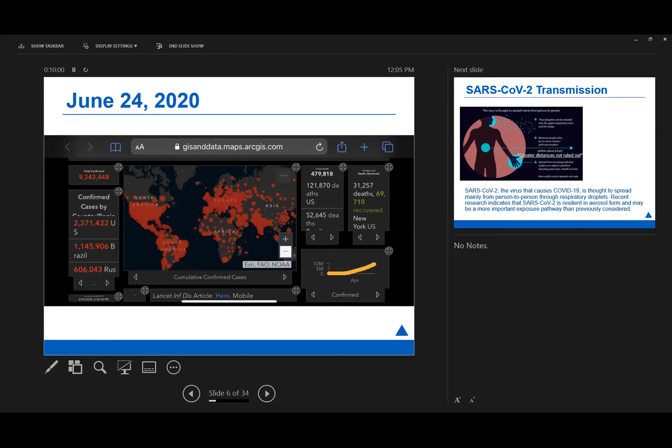So definitely we have a lot going on right now, and we're trying to figure out how to cope and how to deal with it. So the SARS-CoV-2 virus is what causes the COVID-19 disease, and primarily it's spread through droplet transmission. When we're close to people, we're either hugging them, or we're nearby and they sneeze or they cough on us, or we touch something. There's fomite transfer, where you touch an infected surface and transmit that into your body by rubbing your eyes, that sort of thing.

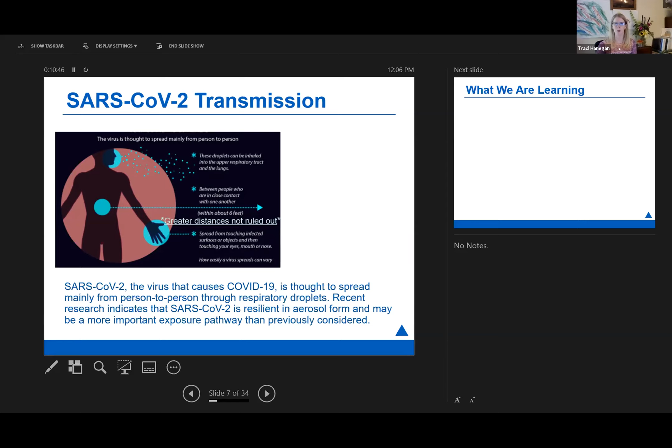But there's also spread that goes further than that. Probably not as severe as measles or tuberculosis, where small aerosols travel for many, many feet of distance and through the ducts and currents, but we're still learning more about how far that can go. But we know that there have been cases of transmission further than what was originally thought.

So the SARS-CoV-2 virus is about 0.12 micrometers, and that's pretty tiny. But fortunately, when people shed that virus, it's almost always attached to a droplet. So when you think about filtration and how small of a particulate you can catch with a certain kind of filter, you've got to remember that it's usually attached to a droplet and it's much larger, so it's easier to catch.

But we're learning a lot, unfortunately, about super spreader events that happen, like the Skagit Valley Choir, where people were obeying social distancing, they were washing their hands, they spread out in the church, and they had 47 out of 60 people that became infected in a 2-hour choir practice.

There's also the Guangzhou restaurant in China, where they had 10 out of 21 people in the room at nearby tables that were infected. One thing some follow-up studies by Dr. Lee showed, though, is that they had really poor ventilation in that space, and that makes a difference. We're going to learn some ideas on how to improve things with that. Other big super spreader events: weddings, funerals, and there's been a big outbreak at several churches that have reopened as well.

And then we learned quite a bit from a study at the University of Nebraska Medical Center, where they looked at people that were sick with COVID-19. They sampled particulates in the room, on surfaces, outside the room, and they found that there was, well, not necessarily viable, but definitely SARS-CoV-2 virus located in all the locations listed there.

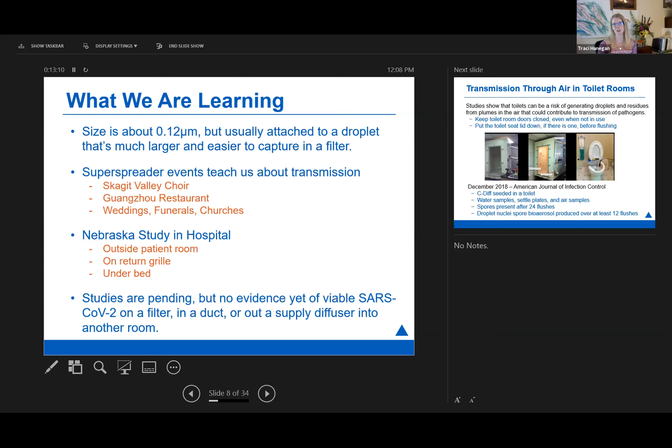We do know that there have been patients with and without COVID in different rooms, and the people that hadn't had COVID-19 were not infected. And so that leads us to believe that it's not likely that it's traveling all over through the ductwork, but again, studies are pending.

We do know that they measured it in toilet rooms, and I'm on the ASHRAE Infectious Diseases Committee. We talk about toilet flush plume all the time and how it can spread pathogens. And this was a study that was done back in December 2018: flush a toilet, and there's still infectious pathogens that can be released time and time again. So we really want to start thinking more about putting lids on toilet seats.

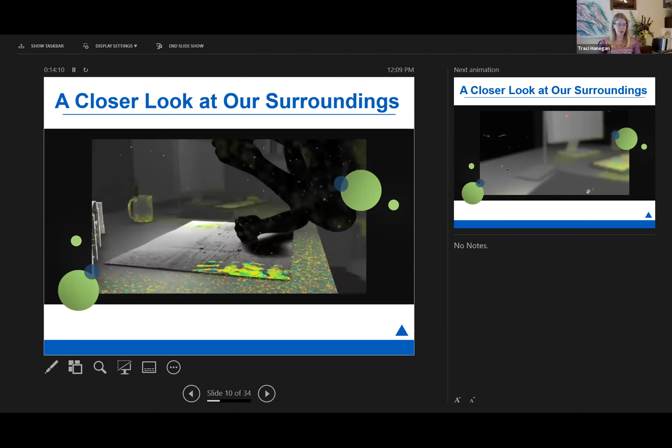So we take a closer look at our surroundings. We look at the microbes that are floating around in the air around us. We're about 1/3 microbe and about 2/3 human by cell count. Our bodies are full of microbes everywhere. And as we interact with our environment, we're shedding microbes and we're picking up more microbes, either by touch or what we inhale. And we know that our whole microbiome affects our health.

It affects people's mental health, our digestion. Poor microbial imbalance can lead to issues with our neurological development and our mental health. It can lead to inflammatory autoimmune diseases. So I worry a little bit about everybody trying to clean up everything and wash our hands so much and bleach everything. What are we doing to our microbes around us?

We really impact the buildings that we live in by what we bring inside with us, but also how we condition that air, the way we filter it, the way we humidify it, or what temperature we have. We build our environment, and then that environment in turn shapes us. So it really matters how we design our buildings.

There are new tools though, and we're going to show you some new tools. This is one: the United States Department of Agriculture's Animal and Plant Health Inspection Service, we do a lot of work for. They came up with a dog sniffing program that's pretty effective, where they can sniff out avian influenza with a dog. And they're using it for medical purposes as well, sniffing out cancers in humans and things like that. So we have new tools for that.

When we sample the environment, we used to set out Petri dishes and figure out what was in the air. Now we can take a swab and use PCR, polymerase chain reaction analysis. And we found that we were only seeing about 10% of the microbes that were out there when we used the Petri dish, compared to what we can now sample and test for. Much more effective at looking at things than we used to be.

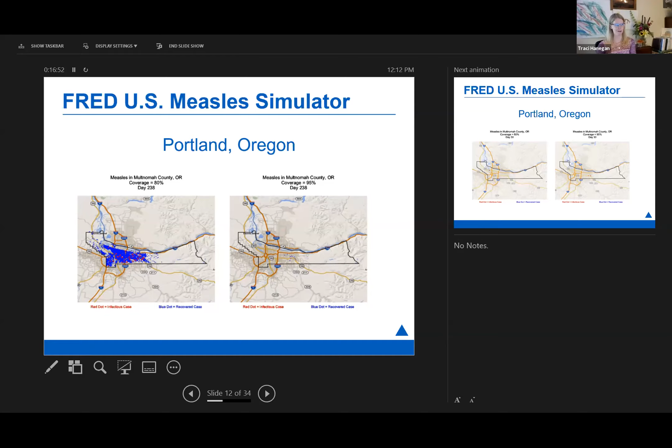Cool. Thanks a lot. Let me share my screen. Okay, can everyone see that all right? Yep. Cool. That's good. Thank you.

So just a little bit about me. I'm a fire protection engineer with Coffman. Originally structural engineer, fire protection. Fire protection is a bit unique, probably more natural to have medically minded people involved in this. But fire protection actually has some pretty direct and perhaps surprising applications. As part of being a fire protection engineer, we're very often involved in human behavior and the different mechanisms by which, especially buildings, are going to impact a human response. Generally, we've been looking at evacuation scenarios, but with COVID, we're looking at a slightly different scenario. So I will share some of the tools that we're using in order to utilize engineering analysis that has often been done for evacuation scenarios for this new environment.

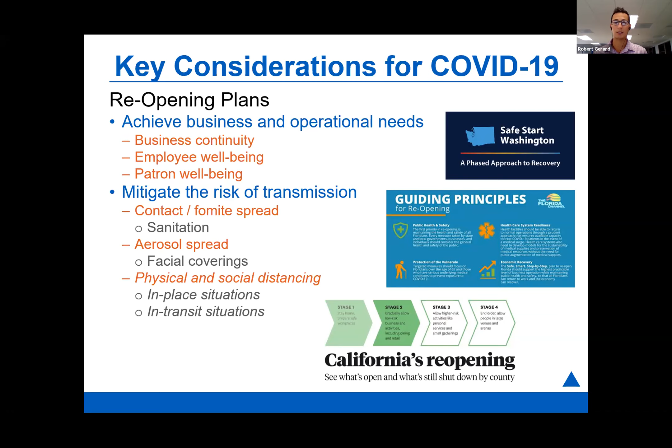So before launching into it, this all kind of fits within the goal of trying to reopen and re-enter society as prior to COVID-19. What we were used to doing as highly social human beings, we like to engage with each other. And of course, that is where a lot of the risk is coming from in terms of transmission from different populations. So as part of the reopening strategy, we're focusing on a couple different areas. Of course, achieving business and operational needs around some of that continuity, just getting back into the workplace, trying to protect, if you will, employees and patrons, and of course, focusing around what is best practice around mitigating some of that risk. So I think we're all familiar with the importance of sanitation, facial coverings, and what we're doing is we're proposing a tool around trying to enhance the capability to physically and socially distance when we are reentering some of those populations.

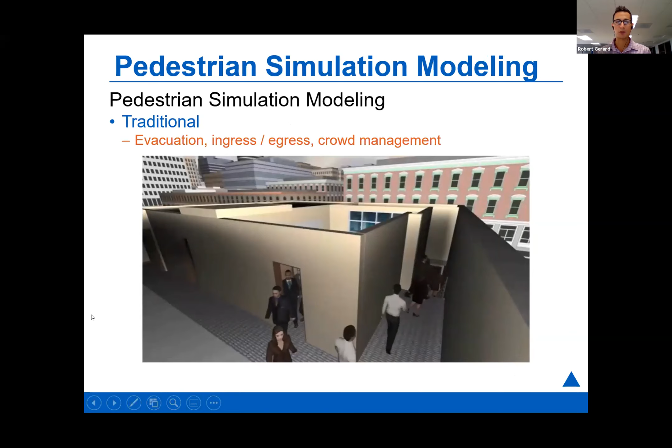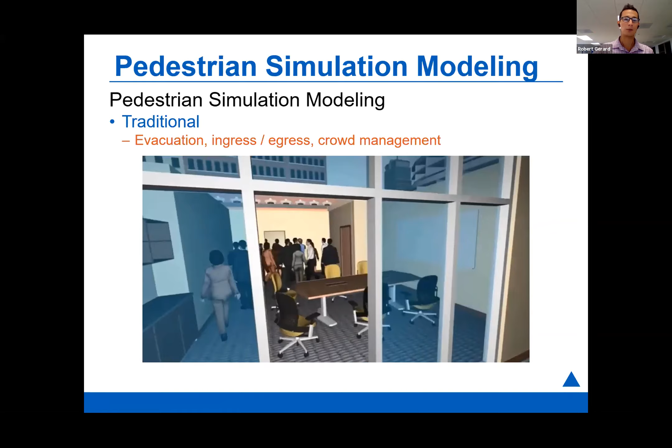So in terms of fire protection, what we've often looked at is evacuation scenarios or emergency scenarios where we can model human behavior in response to some sort of event or some sort of threat, and evaluate how occupants are able to evacuate from these spaces. So this is kind of the traditional way of doing things, and it really is putting yourself in the shoes of what someone might be experiencing and making sure, not just from the human behavior point of view, but also from the building point of view, that we're able to accommodate a response, in this case, evacuating the building, that is going to be acceptable.

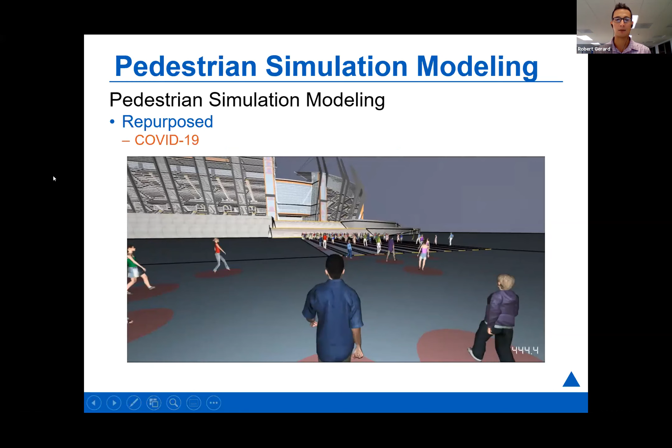So of course, we're looking at a different scenario now with COVID, that we're seeking to try and physically, socially distance from each other. And so there's new considerations that are important to be aware of as we're seeking to try and re-enter and assimilate into this new environment as businesses are opening, as we're starting to have different events, things like that. So as Tracy had mentioned, we're alluding to a couple different mitigation efforts that we as engineers and architects and as patrons can utilize.

Of course, one is building HVAC systems, which Tracy is a great person to talk to, and she's going to talk a little bit more about that after I present pedestrian simulation modeling. But we're going to focus more on physical and social distancing. So when I say physical distancing, what I mean is looking at some of those static conditions. So what are the things that we can do to create physical distance from each other? And this is generally around continuously occupied areas.

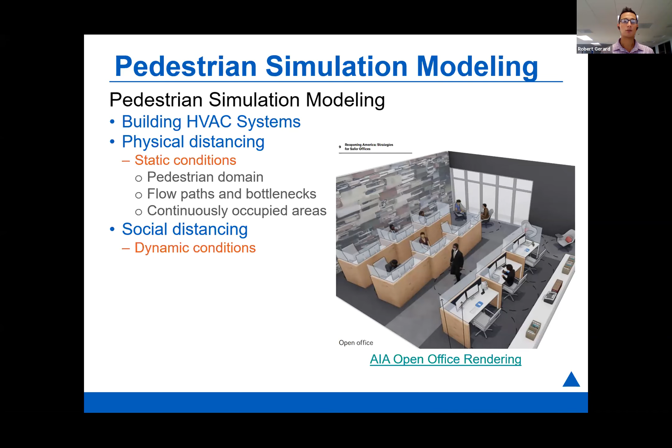So this is something we as designers and architects can look at a traditional floor plan, and we can start to separate our desks, our workplaces, conference rooms, things like that. So somewhat straightforward, which is really positive. But as human beings and as social and dynamic creatures, social distancing is a little bit more complicated. What happens when people start to move, then those static plans that we're looking at start to become a bit challenged. So how do we maintain that 6-foot separation? Currently that is the best guidance from CDC and a number of organizations.

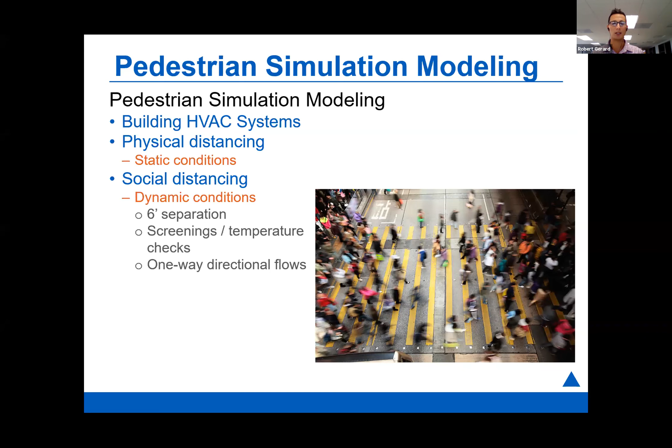And what other checks are we going to have in order to verify or kind of evaluate the risk or certain indicators that might indicate that we might have to isolate certain populations? So there's things that we can do in order to evaluate some of these criteria and try to implement these best practices. So some considerations that go into that, even before we do the modeling, is firstly understanding what the built environment is. And so one way to think about this is the architecture and the engineering.

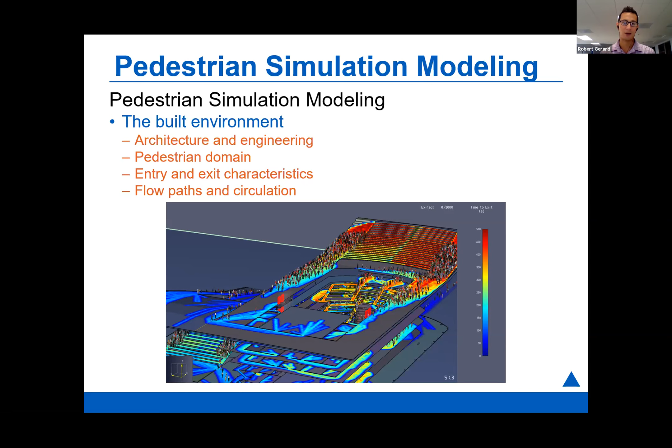So what is the domain that occupants or patrons or pedestrians could navigate within a space? What does this mean in terms of different flow paths, entry and exit conditions, especially vertical egress? I'm sure we've all seen bottlenecks at stairs, escalators, ramps, things like that. But understanding some of these considerations. This is where fire protection engineering starts to become a bit more relevant, is not just looking at the architecture and engineering, but also looking at human behavior.

And so it's trying to understand what the experience of the occupant would be and what some of these goals are. And of course, there's quantitative metrics that go into that. And fortunately, in the field of fire protection engineering, a lot of this is quantified based on available data that can be utilized and applied in a number of different ways.

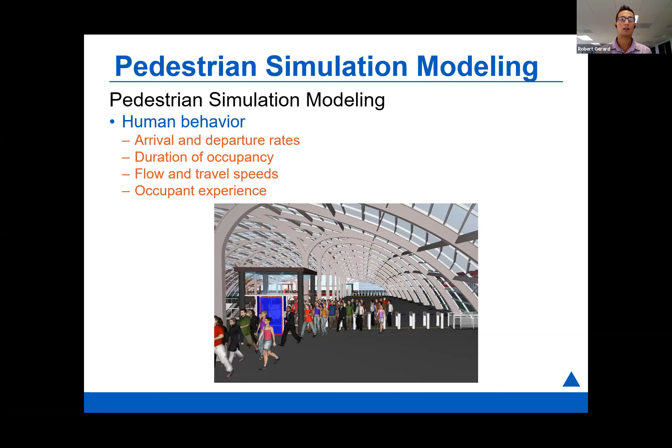And when we start to get into COVID-19 management procedures, looking at that more dynamic environment, we can start to utilize and apply some of these different considerations that we're starting to have to pay attention to into these models, into simulations. And it's a really powerful visual tool to graphically and analytically show what this sort of response would be. So this video that we're seeing right here is the application of the 6-foot separation, showing that occupants are really seeking to distance from each other, and what that means in terms of the flow and the movement within the space.

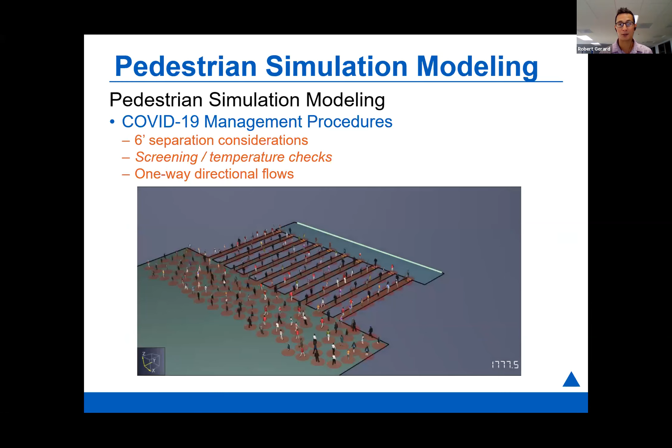Another way to evaluate this is if we're going to have, say, screening or temperature checks, understanding what that means in terms of the markers. I'm sure many of us have tried to go to the grocery store and had to wait outside for a little while. And so understanding realistically what that means in terms of different management procedures, and maybe there's a way to entertain people if we know that we're going to have a 20-30 minute queue waiting outside.

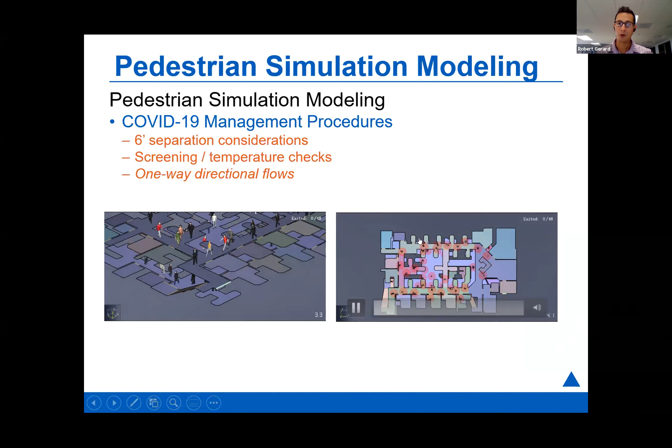And then another way is acknowledging that in the traditional sense where we're able to congregate, we're able to be closer and have tighter densities to each other, trying to look at ways to reduce the number of interactions or the amount of interactions, or another way to look at it is the density of occupants within the space. So something like a one-way flow. So again, we've probably seen that at the grocery store, all intended to try and minimize the number and the amount of interactions to try and have a more efficient directional movement within spaces.

So one way to think about it is as a digital due diligence: as we're all trying to focus on reopening and preparing our workplaces, our sites, our offices, or potentially even larger event centers and the like, to be prepared to protect against and mitigate some of these risks of transmission, it's important that we're very clear about what it is that we're actually trying to achieve.

And there's a number of sources available. I'd highly encourage everyone to take a look. But this is something that I thought was really interesting, something that Tracy shared around the hierarchy of controls. There's a number of different steps, if you will, that we as occupants, as designers, as managers can utilize.

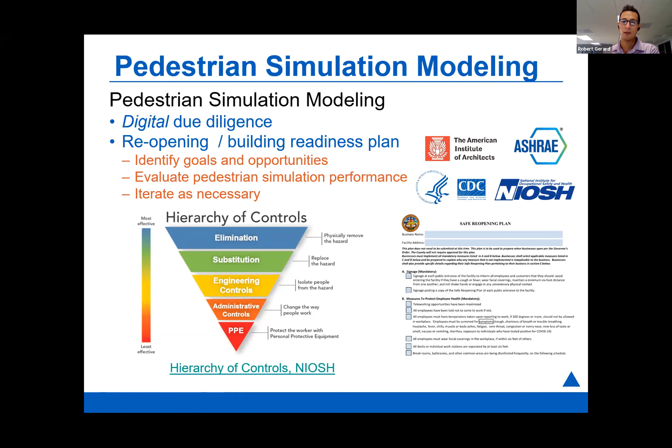This type of tool is within these engineering controls: where we are seeing a greater level of risk, say we're located in a hotspot where there's an outbreak, or we're especially concerned about vulnerable populations, we're able to utilize additional measures to try and control that risk. It would be great if we could eliminate it, but within the realistic bounds of our current situation, we try to control that risk.

So we're quickly going to look at a case study and what that looks like. We've looked at a number of different organizations, situations, clients, and we thought that this one was maybe a little bit easier to recognize some of the value, primarily because it's a little bit smaller. I'll share a little bit about some of the considerations about larger venues at the very end here.

This is an art gallery and design exhibit, primarily assembly occupancy. They seek to have large galleries, exhibitions, large events. Of course, that's probably not feasible within our current environment right now. So we're helping this gallery to understand what it is to reintroduce occupants and patrons within this environment and what this is going to mean in terms of trying to achieve those social and physical distance practices.

So a quick little overview of what the gallery looks like. We have a large outdoor entrance arcade, and it's a primary entrance coming into this mezzanine area, an entry desk where occupants are able to get information, learn about the artists, learn about the different installations, and then proceed down the stair into the large open gallery area on the bottom where there's a number of different installations and different spaces to traditionally interact with them.

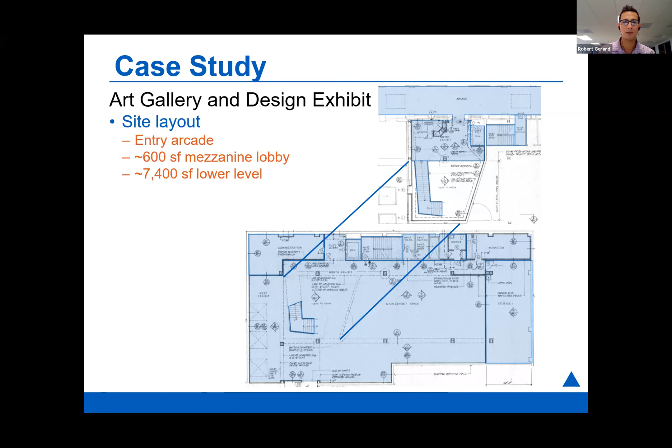Of course, due to sanitation reasons and contact, that was recommended to not be encouraged or utilized within the space, so that's something the organization has sought to remove. Even before we did the modeling, there's a couple different items to think about. Firstly, knowing your business, your site, your patrons is a big one. What is the experience that you're trying to curate? And being clear on our priorities: as we're entering this COVID environment, what is it that we're trying to achieve?

In terms of knowing the business, probably the reality of the situation is knowing what the business objectives are. Many businesses are seeking to reopen and get closer to pre-COVID conditions. So what does that mean for this organization? We might speculate on that, but it relies on a level of interaction and engagement with the organization.

One of the key points that I thought was really enlightening for me was that, in talking about the business needs of this organization, donations were a very large facet of how they were able to financially support themselves. And one of the key aspects of getting donations is to facilitate that face-to-face interaction and share details around the local presence of the artists and their impacts, the different events and organizations, and especially the philanthropic efforts of the Institute.

And of course, this relies on being able to spend time and have a conversation with your patrons, which comes with associated risks. So it's a business reality, but also something that needs to be taken into consideration as part of the social and physical distancing.

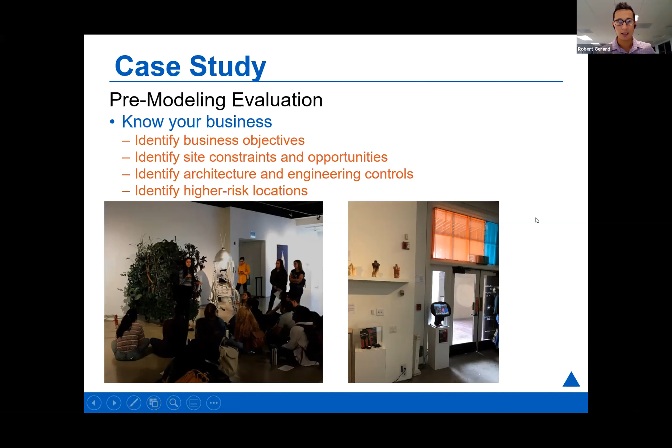And of course, one of the other constraints is going to be the site itself, so that architecture and engineering. And so identifying some of those key hotspots even before we did the modeling. So acknowledging we have a large outdoor space, trying to utilize some of the queuing on the outside, that if we're going to have a temperature check, or if we're going to have this conversation about donations, about the intent of the space, some of the background of the different artists, it's encouraged to occur at a location where there's maybe a little bit more ventilation, have a plastic screen or a barrier up to try and mitigate some of that particulate spread.

Getting down into the space, identifying that we have the potential for a directional flow down and up. We actually wanted to use the stair over here, but what the organization was seeking to do is try and have a donation box at the exit as well. So entry in one side, coming down, and then exit out the other, and then have a donation box at the end over here. So understanding you could potentially have bottlenecks at the top and the bottom of the stairs. This stair was considered to preferably be available for evacuation scenario, but not for this COVID environment.

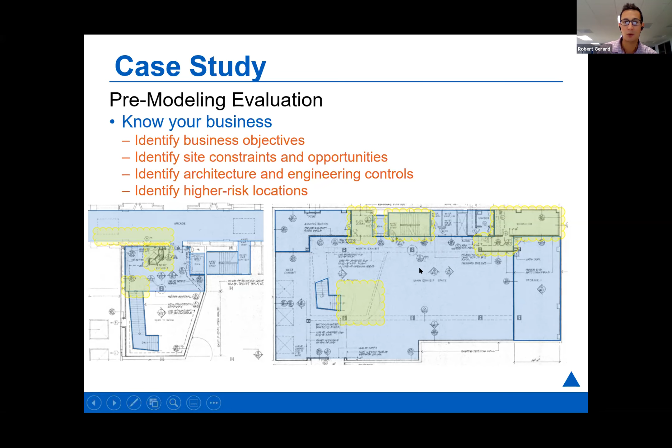Looking at different dead end possibilities, make sure that we're trying to mitigate the interactions between patrons in this location. We have an elevator over here, so another potential queuing location. So a number of different considerations taken into account even before doing the modeling itself.

Looking at the patrons, seeking to try and have something resembling the original occupation of the space. I don't know that we'll be able, or probably it is not recommended, to have the density and the number of patrons that they had before, but seeking to try and figure out what a reasonable maximum number could be within being able to achieve that density limitation and being able to confirm that occupants are going to be able to space out if they're within that 6-foot bubble, if you will.

And one of the important keys is really putting yourself in their shoes too. So understanding what experience it is that we're trying to curate in this space. We want to be able to enable people to wander and explore and to spend time with the installations and get up right next to it. So we know that we're going to intentionally try and not have as many occupants so they're able to be comfortable within the space and interact with the artwork in a way that is conducive to what the gallery is intending to do.

So in terms of some of those priorities, of course, well-being and health is one of the top priorities for any organization, but being able to achieve those business objectives and be able to curate that experience. And so what we did even before we did the model is try to identify some acceptance criteria, if you will. So what is acceptable and what might be less acceptable even before we do the model, so we can look at the results of the models and then evaluate the performance. And then we can collaborate with the organization to understand what sort of changes might be appropriate.

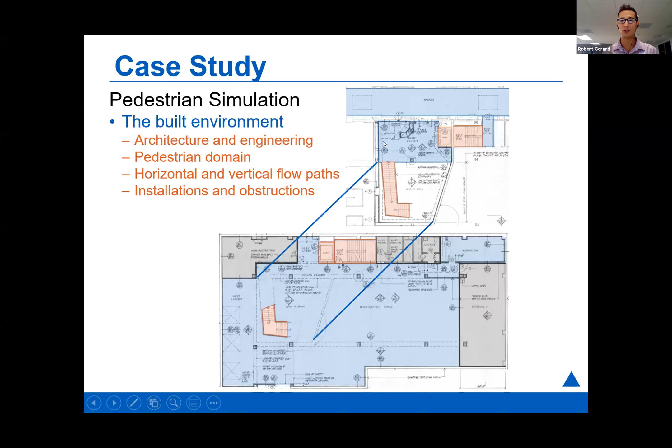So finally getting into building the model here, one of the first steps is to understand where our domain is. And so we have a large outdoor arcade, we have this entry lobby, we have our vertical paths of ingress and egress and flow within the spaces, and identifying where front of house is, where back of house is, and making sure that we're aware of the different areas. Of course, the installations are another key aspect of that.

So working with the organization to understand not just diagrammatically, but also kind of physically what a reasonable obstruction might be in terms of where occupants can't go. But in addition to that, highlighting where we want them to go. And this is probably one of the keys that's unique to this space, and really understanding the unique needs of this gallery: some of these areas right in front of the installation are going to be areas where we're actually going to want and encourage and enable some of the patrons to spend a little bit more time and to really spend some time with that artwork and to be distanced from each other all the same.

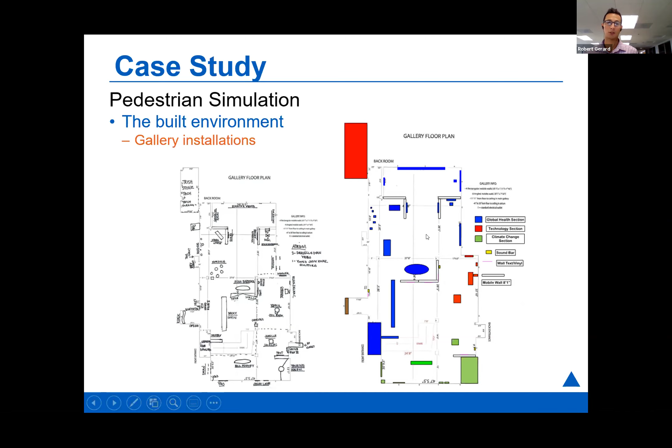So I think it's really important to be able to have some of these open spaces, but the distribution of patrons is an important consideration in addition to some of those overall goals. So what does that mean in terms of the model? As we're looking to build it, we're trying to build in some of these physical barriers within the space to physically distance from each other.

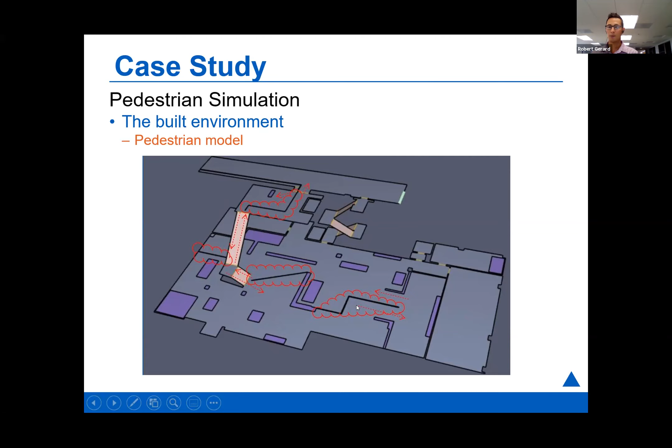So we have some queuing on the outside, we have our one-way flows, and we're really trying to utilize, if we can think of a one-way directional flow, not just in some of these locations, but seeking to implement something of a counterclockwise flow here. So as you come down, you're moving around this location, and with everyone moving in the same direction, hopefully they're also being aware of their social distance from each other as well.

So incorporating some of those patron behaviors, some of those quantitative metrics: how long do we find on average that patrons are going to be within the space? How many people do we anticipate? What do we think is a maximum number of occupants that could be utilized within this space within these current conditions? So a far cry from the 250-ish occupants that they might have in a pre-COVID situation, but somewhere in the estimate of 20 to 50 patrons, and that's something that the business would be pretty happy with.

Incorporating some of these physical and social distancing parameters is important as well. And so when we're looking to try and do that, we can apply a wait time, simulating some of that interaction with staff as the different occupants are entering within the space, and creating almost waypoints, if you will. So assuming to some degree that each of the patrons is interested in checking out the different installations and the different pieces of artwork, having them move along together within a path. And this is something that we might be specifying, but it is something that we can also randomize as part of this assessment. So there's a lot of flexibility in ways that we can direct and manage the patron movement within this space.

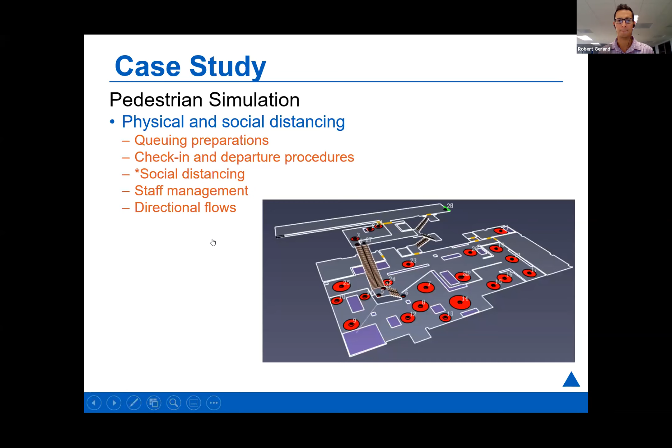And what does this look like? It's very much an iterative process working with the organization. So one of the first steps we did is look at, well, what does something like 20 patrons look like? And so of course this is fast forwarded, but we can see that different patrons are coming in, spending a little bit of time at this entry location, and then spending time with the different galleries, installations. We can see that they're pretty well spaced out. So we have a couple occupants that are somewhat close to each other. We can see that they're maintaining that 6-foot separation. And so this could be considered a pretty effective means of applying that physical and social distancing within the space.

So one of the benefits here is we can graphically see that at first glance, there's no real red flags. So what does that mean? Maybe there's an opportunity to increase the number of patrons and see if we're able to accommodate this sort of behavior with a greater number of occupants. So we kind of shot for the moon on this one, and we went up to about 50 patrons, and we can see that all this behavior up at the entry seems to be acceptable. This one slowed down a little bit compared to the first one, but we can see that with the greater number of patrons, it's having a pretty significant impact on the flow within the space.

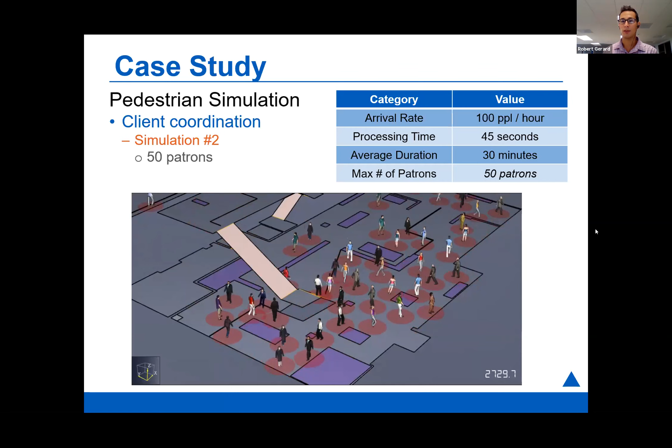And one of the primary concerns: while they're able to maintain, for the most part, that 6-foot distance, we can also see that they're challenged to be able to become intimate with some of that artwork, that they really have to be careful and manage their behavior within those spaces in order to maintain that separation. And maybe they're not able to really focus on that artwork. And maybe this isn't as comfortable an environment as the organization really intends within this space. So we can look at some of the output from that. So graphically, we can see that maybe this isn't the behavior that we really want to encourage, but quantitatively, we can also see what that means.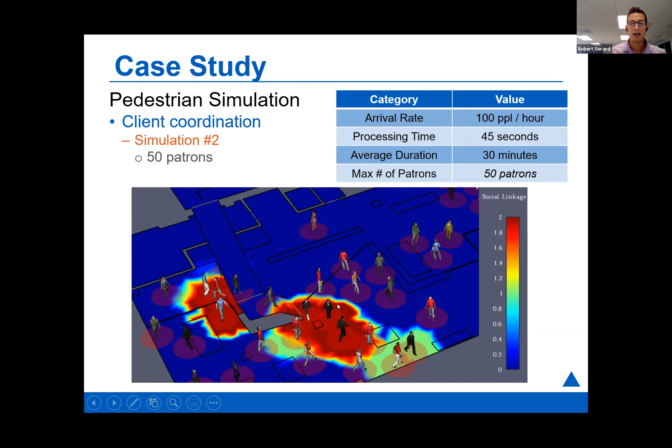So we can look at some of those hotspots and some of the different areas where we are seeing a greater level of interaction between some of those patrons. And there's some different ways to try and mitigate that. Obviously, decreasing the number of patrons is one way to do it, but maybe there is greater staff management in those areas. Maybe we help to try and locate different staff at these. Maybe at the bottom there's a large entrance board that people can read in this location, so maybe they can be directed there. There's different opportunities in order to try and mitigate that.

But probably one of the more direct ways, acknowledging some of the limitations of the number of staff due to financial concerns, due to other business realities, is trying to create an environment in which patrons are more or less policing themselves and socially distancing without having to be too actively reminded by staff to behave in this way. So looking at about 30 patrons, this seemed to be the sweet spot for the organization.

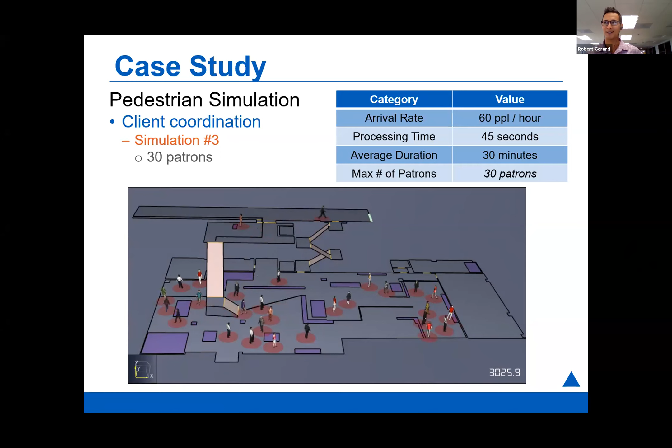So based on the graphical model, we can see that there's a little bit more interaction, and we're seeing people starting to get within that bubble a little bit. But for the most part, they are keeping their distance. They're able to spend some time within those installations. And this sort of experience is something that the organization thought could be acceptable within what they're seeking to achieve. So they're actually opening up next week, which is really exciting. So we're all very interested to see how this goes and how this matches to reality.

But all of this is starting to be documented and implemented in their reopening plan that each of the organizations within, it's actually a large cultural center, is required by the local area to produce in advance of opening. So it's great to see that they've been mandated to put some thought into this. It will be interesting to see if other localities will also be mandated to do so.

But pedestrian simulation modeling is a tool that can be utilized to graphically and quantitatively show, kind of do a digital due diligence, if you will, what reasonable occupant capacities, maximum flow rates, densities could be, and how staff can be deployed, how this can all be managed in order to get the experience that we're all seeking to enhance within these new environments. So we're curious to see how this goes.

We're really interested, once the organization opens up next week, to really work with them and continue that relationship and to validate our models based on what they're actually seeing on site. So perhaps people want greater distance from each other. So right now we have 6 feet, we can go to something like 7, 8 feet. There's a number of different parameters that we can modify. So it's really interesting. It should be very insightful.

So of course, that's a small scale example. And what happens when we start to look at larger events? As we're seeing increasing reopening, I think we're also seeing larger events seeking to try and open up as well. Remains to be seen if we're going to be able to have, in this example, fans. So this is something that simulates maybe a university or some sort of large event where they have a sporting event. We have this huge rush of people trying to get in right before kickoff or first pitch or something like that.

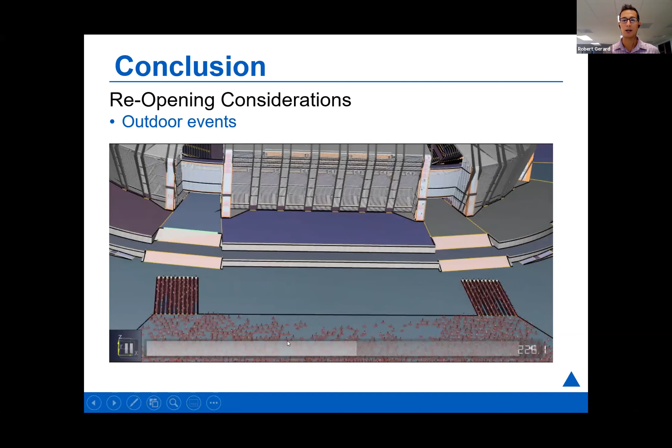And so being able to model the situation and understand based on the available ingress or egress, entrances, temperature checks, screenings, numbers of people. Maybe the way that we've been doing things in the past, where we allow people to show up at their own leisure. Maybe we want to have a phased entry, or maybe we want to target them and ask them to go to different strategic entrance points to try and mitigate some of that movement around in the different spaces. So this is one way that tools, especially for larger events, can be useful.

We're starting to hear more conversation about schools and universities opening, and I think a lot of these considerations also apply. So it remains to be seen how this is going to be deployed, but pedestrian simulation modeling is one tool that can be utilized as part of that digital due diligence to show that this is something that can be feasible, that we can open up, maximize our classroom space, maybe have a combination of web learning and physical learning in person. Maybe we're going to have phased classrooms or schedules or teaching sessions.

Maybe it's coordinated with mass transit to try and limit the amount of time that people are interacting with each other. There's a number of different situations and considerations. And at least in my opinion, I think it's valuable to think about these in depth before we go and we open up.

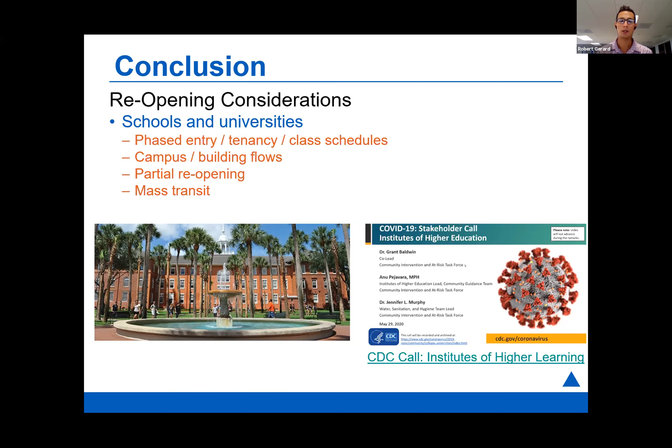And as Tracy's going to talk about a little bit more in just a second, some of these indoor events are starting to open as well. And so just acknowledging some of those considerations around physical and social distancing, some of that particulate building controls around ways to mitigate some of that risk of transmission. So as these events are starting to happen, just being aware of some of the things and considerations and thoughts that perhaps should go into this before we decide to have these events.

So that's just about it. So we've talked quite a bit. Of course, sanitation is really important, physical, social distancing important, and we're seeing a lot more guidance from different organizations about what some of those reopening considerations might be. And hopefully in the last 40 odd minutes, we also have a better understanding of how pedestrian simulation modeling, fire protection engineering can be utilized to help that process, really go through it and have a better idea of what having people in these spaces looks like before we invite them back in.

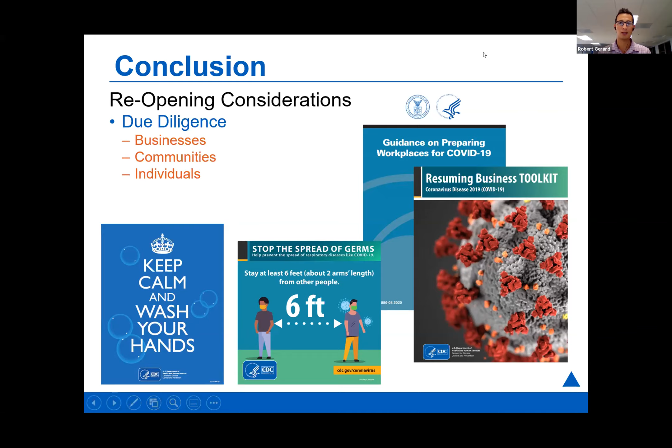So with that, thanks a lot, and I will hand it back over to Tracy. All right. Thanks very much. Okay. So, get a better view this time.

So now looking at the pedestrian modeling, we see where we can do things to the built environment that mitigate by doing one directional flow, limiting the number of people, those kinds of things, and we can make improvements. But there are going to be situations where we can't make it much better and people are going to be closer together than we want them to be. So then we start looking at other opportunities. What else can we do to the built environment to mitigate risk? And there are a whole host of different things we can do, and I'm just going to share a few ideas with you to get some conversation going.

So we can look at airflow patterns, moving things from clean to less clean. We usually say that instead of clean to dirty. So the way that air moves in a space, we're concerned if we have somebody in a space with a window air conditioning unit and it's blowing air at somebody, what if they're infected and then that air is blowing over across the room to somebody else? So anytime you have air moving from one person across multiple people, you're increasing the risk because we know that there's a lot of asymptomatic spread that can occur with SARS-CoV-2.

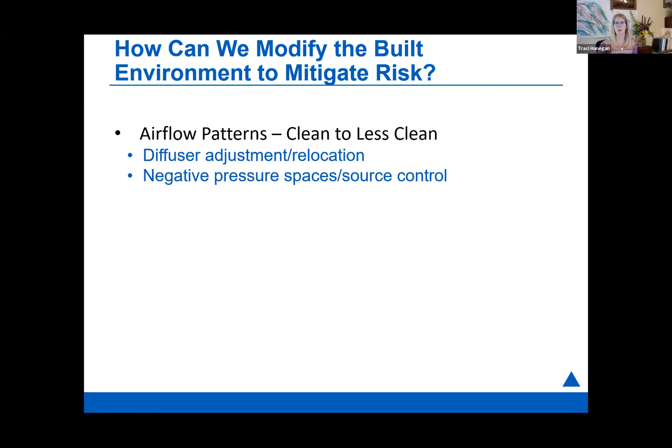So we can play around with diffuser layouts and adjust airflow patterns in the room in some cases. We also can make rooms negative or do source control. We think of that more often in the past with laboratories and healthcare environments, but we can do things like that in other spaces, not just labs, healthcare, where it makes sense. We want to try and control some risk.

We can also play around with the furniture layout. Hinted a little bit about that with the pedestrian modeling of how the space gets configured, but you can move chairs and tables and things, not just to create space, but to also put people in a better pattern of airflow in a room. And then a lot of folks are asking about these recirculating HEPA filter units, and is that good? Should I put one in my space? Do I set them up all around my office? And how many do I put per square foot?

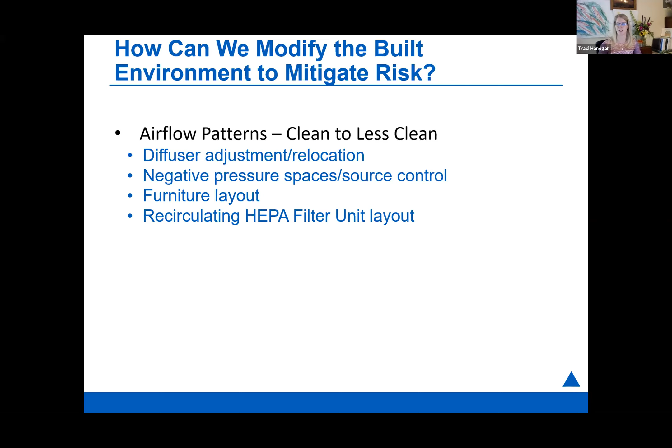One thing that we know is that these airflow patterns really matter. So where those get placed, what direction they're blowing out, what direction they're drawing in from makes a big difference. Kishore Kankari is a CFD modeler that is a colleague of mine. I've asked him to run some sample simulations of those to start trying to get some better parameters for design and guidance for people on those kinds of systems. And I want to talk for a minute about the difference between filtering the air more versus bringing in more outside air.

And some people want to know, well, what's better to do? Should I bring in more outside air? Should I add better filters? What if I can't do one or the other? What does it matter? So this chart will give you an idea. This is for a 500 square meter, which is about 5,000 square foot office building.

And what it's showing is this measurement and mean relative risk of infection. And then what happens when you filter a building or bring in more outside air. And the outside air are these colored lines. So like in Phoenix, if you don't bring in much outside air, it's very cheap, you're not using a lot of energy, but you have a higher risk of infection.

And as you increase the amount of outside air that you bring into a space, the cost is going to go up because you have to condition that air, and it's hot in Phoenix most of the time, but you're going to lower your risk of infection by adding extra ventilation in that space.

If you look at filtration, MERV 4 filter is kind of a variable refrigerant flow ceiling cassette type filter. You can get about a MERV 4, and that's about the best you can do. A lot of pre-filters in air handling units are MERV 7, and then you start getting into some of the LEED buildings where we see MERV 11, and MERV 13, 14 really seems to be a tipping point in terms of filtration for a space where you're getting a lot of benefit in terms of capturing viruses that may be attached to droplets, but the cost hasn't gone up a lot compared to MERV 4

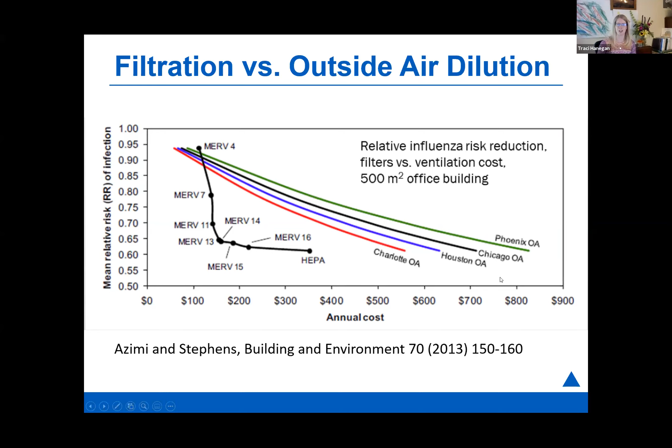or MERV 11. Once you start going beyond MERV 14, you start getting into what we use more in a pharmaceutical or a healthcare application, and the cost goes up considerably, and there's not very much benefit in terms of infection rate. So just gives you an idea of something to consider. I have some other information that I could share where we looked at pros and cons of ventilation versus filtration. We talked about those things. There's also options to do disinfection.

So UV lights are very well proven. CDC's been using them for tuberculosis control for decades, and there's a lot of really good published peer-reviewed research on it. You're going to see a lot of information now out there about other kinds of disinfection cleaners and ionization units and things like that, and people are wondering about that. And it's really important to evaluate the claims, looking at whether or not there's research from peer-reviewed journals that are very reputable versus third-party studies, which is often just the manufacturer paying another company to run the test for them. Very different from something that's peer-reviewed.

And then some of the tests happen, like there's one product where the test happens in this very small container with very perfect conditions, and they're not even comparing what would happen to the death of a virus if they didn't do anything, they're just saying a lot of the virus died. But how do you really know if that's because of this product or the virus would have just died anyhow over that length of time? Is the product supposed to be used in a static condition, or is there a bunch of air moving through an air handler and it's supposed to kill the virus? So important to think about that, because there's a lot of promotion of products that maybe aren't as effective as you might think at first.

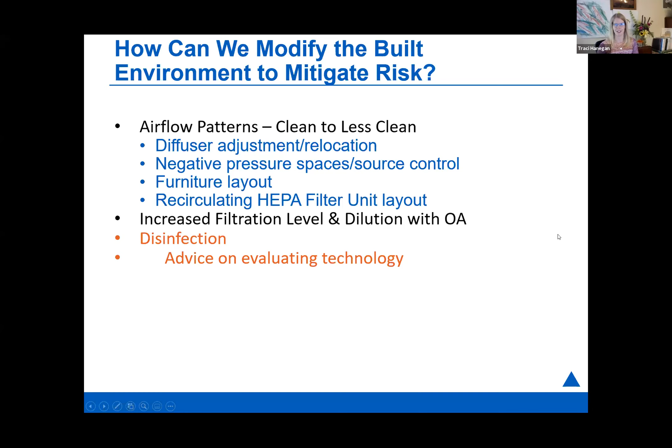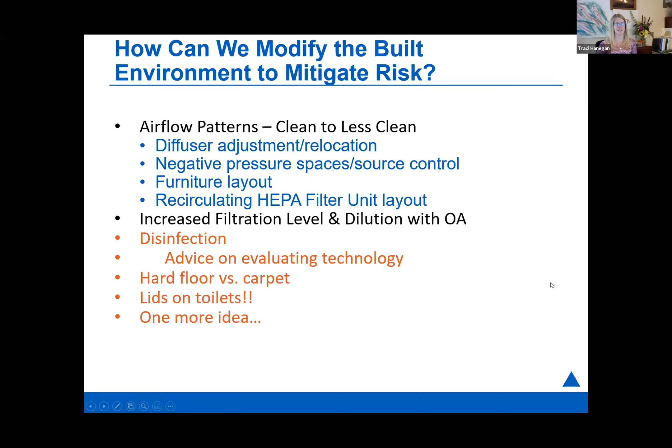Considering things in the built environment like hard floors versus carpeting, where carpeting is much harder to clean and holds a lot more particulate. Putting lids on toilets is another biggie. And then I'd like to spend a few minutes talking about another idea that I have that is something that I'm real passionate about. So when you think about people coughing, you think about particulates coming out, but a cough is really a lot of liquid, and it spews out at a great distance.

And what happens to those droplets is very dependent on what the air condition is, the temperature and the humidity. So if the humidity in the air is really low and dry, those particulates can desiccate, and the moisture in the droplets dries out, and what's left is a smaller aerosol that can float in the air for longer distances.

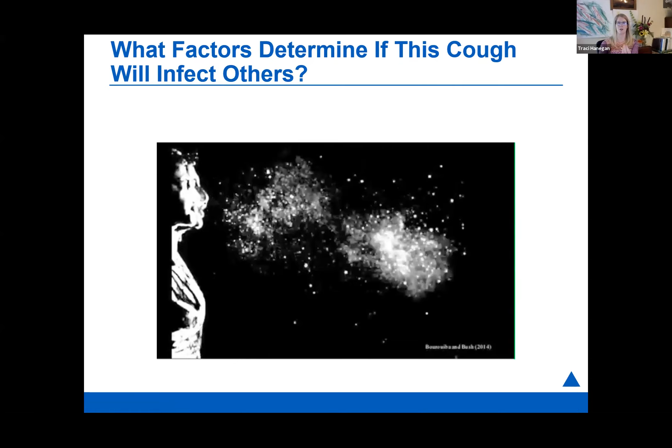And if the air has a higher moisture content, then the moisture stays in those droplets, and those droplets tend to fall out and drop and not travel as far. They also don't get inhaled as deeply into your lungs because they're bigger particulates, and they get caught in the cilia, which is the hairs that line your bronchial tubes and help clear your airway and keep particulates from getting down into your lungs.

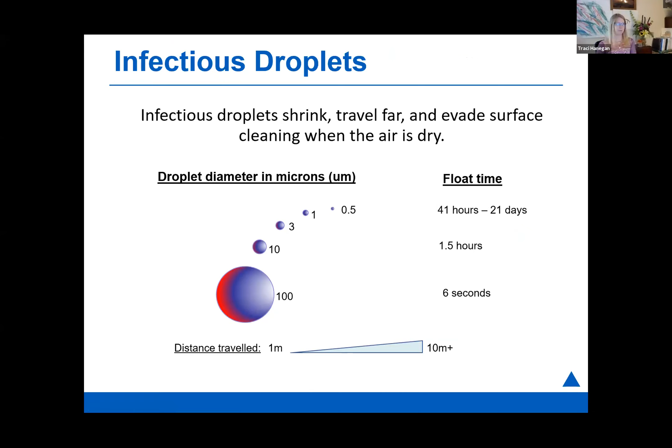So there's this study that happened a few years ago. They wanted to look in a hospital at the patient environment. They looked at 5 patient rooms on one floor, 5 on another floor. There was a med surg and an oncology. And they measured all kinds of parameters. It's called the Microbiome Project. And they were looking at how microbes travel through a new hospital.

And fortunately, they also ended up taking a look at healthcare-associated infections during this time period. And they collected a whole bunch of data. And at the end of it, there was an analysis done by a colleague of mine, Dr. Stephanie Taylor, to look at whether anything was correlated between the healthcare-associated infections and all the different parameters that were measured, with temperature and lighting levels and room traffic and the air change rate.

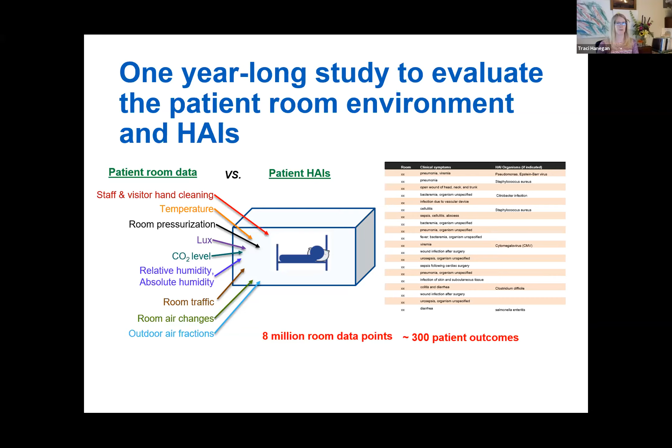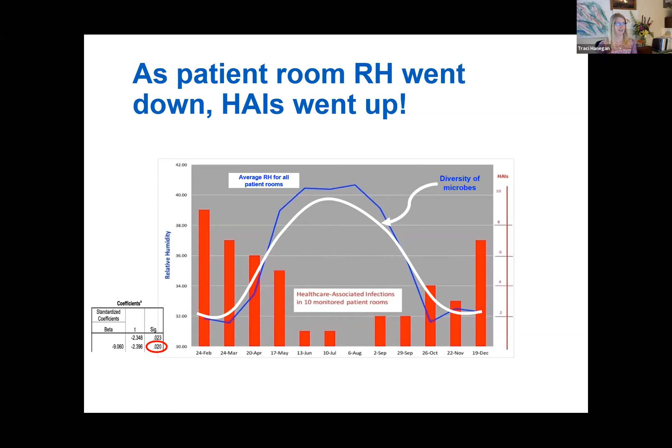They also were doing PCR analysis on swabs that they took in the space, on people's hands, on surfaces, in the air, and they were looking at the diversity of the microbes in the space, and they found that there was a correlation also with the diversity of microbes, because having that moisture in the air prevents some of those microbes from going away.

We also know that there have been a lot of people, unfortunately, who have become infected and who have died from COVID-19 during this pandemic in long-term care facilities. Residential healthcare facilities like Alzheimer units, nursing homes, and hospice type facilities contacted us saying, hey, what do we do? We need some help here.

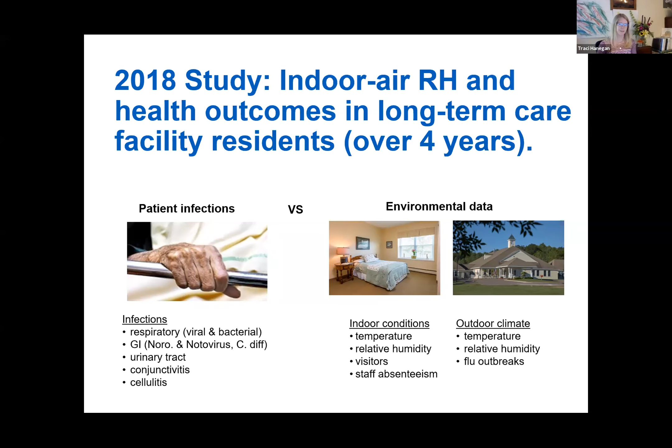This was a study over 4 years to look at the indoor and outdoor climate and to see what that might do with infection rates. And what they found is that for respiratory infections and also for gastrointestinal infections, the level of those was way down when the relative humidity within the space was between 40 and 60% RH.

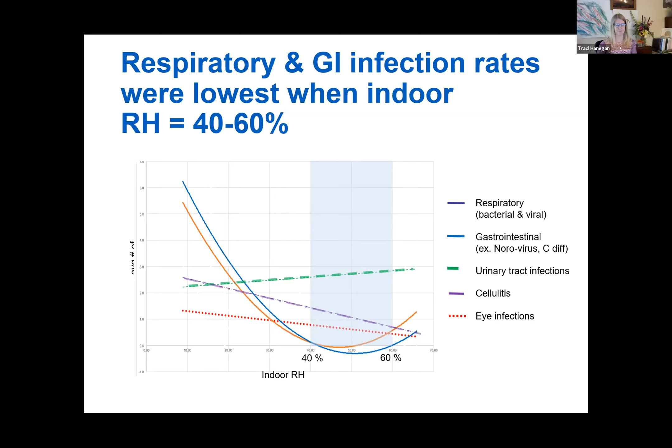The Mayo Clinic also published a study in 2018 where they took a preschool and they took several rooms in a preschool, left them unhumidified, and took several other rooms and humidified them up to 45%. And then they sampled the space, did PCR analysis, looked for influenza virus in the space, and looked to see not only was there virus, but how viable and infectious that virus would be.

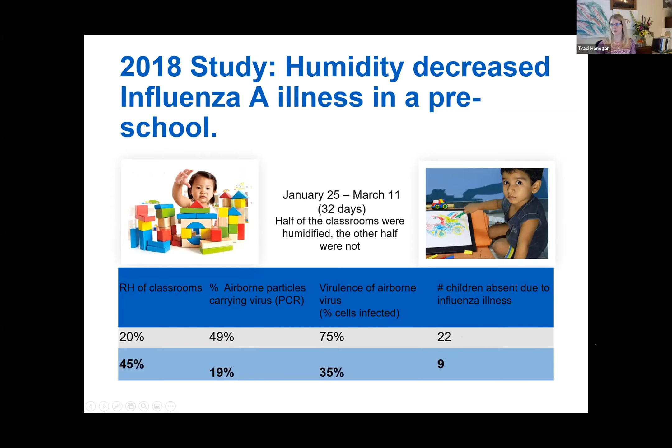And these are the numbers they showed. In the classrooms where there was no humidification, a much higher level of airborne particles with virus. Those particles were more virulent, and they had a lot more students that were absent due to influenza type illnesses during that case.

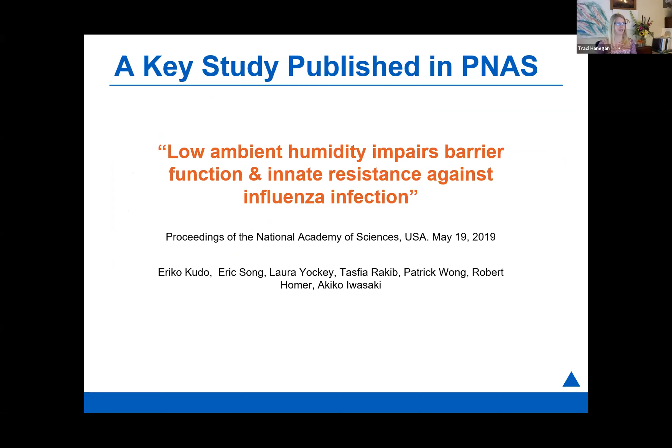Last study I want to share with you is PNAS. It's a great journal, and there was a study that was done by some Yale scientists about ambient humidity, and they set up a study where they took mice, and they had to do it with mice because they ended up cutting up their lung tissue to inspect them afterwards. But they put them in two different chambers, a 20% relative humidity chamber and a 50% relative humidity chamber.

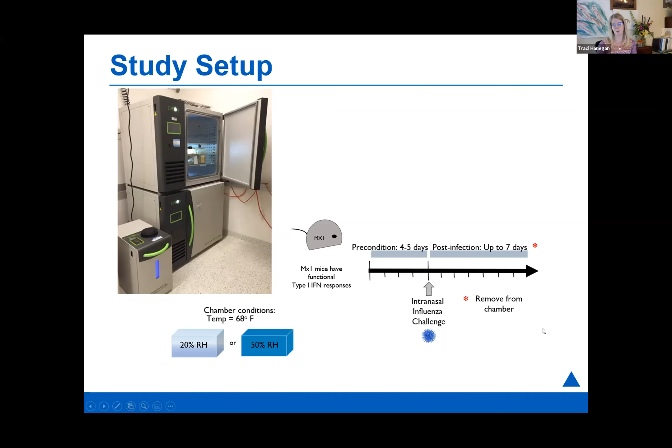And they left them there for 4 or 5 days, and then they infected them with influenza, and then they left them there for another 7 days and then took them out of the chamber and compared the difference between the two. And what they found was that the cilia in the throats of the mice did not work as effectively at moving and taking particulates out of their lungs. And the same thing happens in humans when we get dehydrated and we're breathing dry air, is that our lungs aren't protected as much by the cilia.

We also have a first line immune response called interferon, and that's basically our body protecting us from infection, and that gets diminished in the dry air. We have decreased inflammation and tissue damage when we increase the relative humidity and have better indoor air hydration, and the repair of our cells is also better.

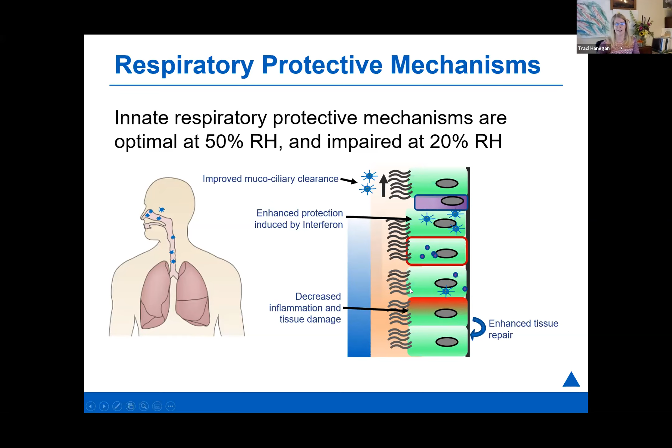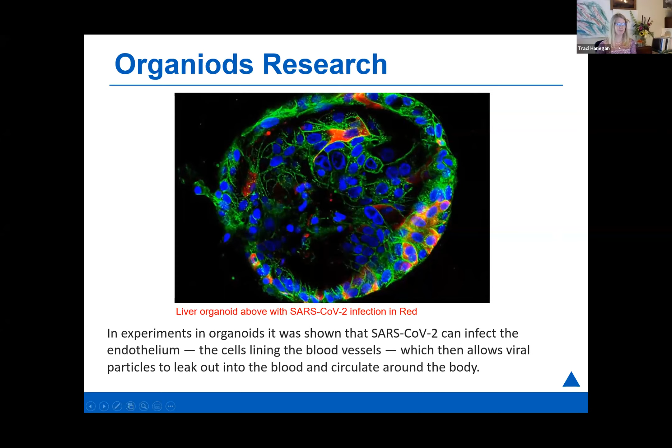There's some neat research going on now with things called organoids, where we take some cells from one of our organs and grow another tissue culture that's similar. And they've done some studies. This is a picture of a liver organoid infected with SARS-CoV-2. And we've learned that there are different parts of our body that actually get infected with the SARS-CoV-2 virus. So they're studying how that is impacted, and we're hoping that they do some studies on that with relative humidity as well.

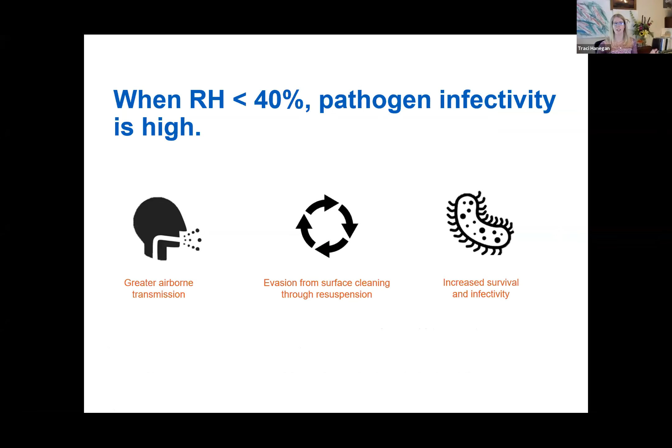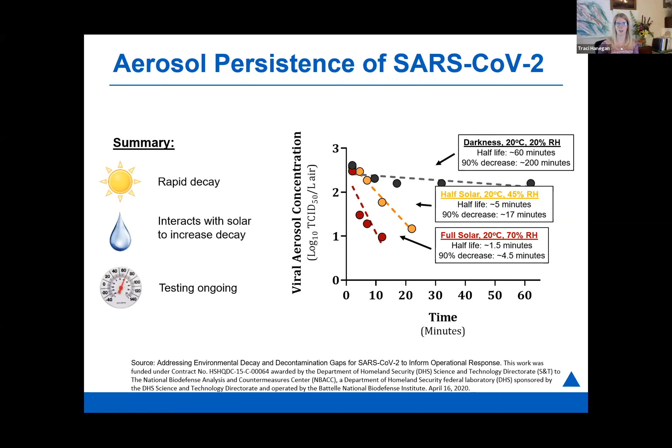So when the relative humidity is below 40%, you get a lot more infectivity. It's hard to clean spaces. When someone coughs, it's going to travel further, and the viruses just survive longer. This is a preliminary study done by the Department of Homeland Security, the biodefense folks put this together, and they looked specifically at SARS-CoV-2 in darkness, at different humidity levels, in the sun, partial sun, and at full sun. And they found that there's quite a bit of decay of the virus when you get a lot of solar gain and a higher relative humidity. This one was for aerosol. They also did it for a number of surfaces.

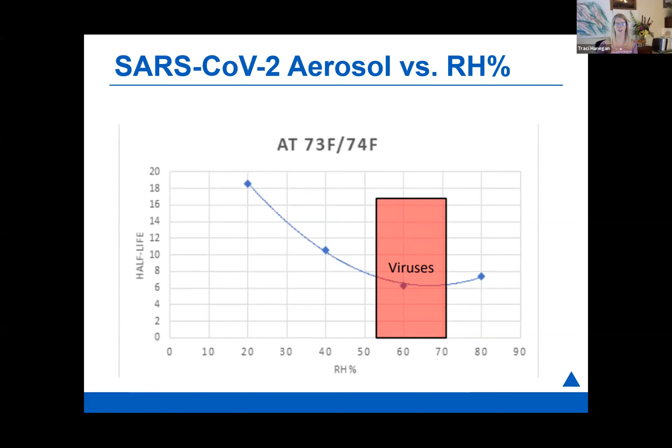And a colleague of mine also made a graph then from that data of the half-life at different relative humidities and found that there is a sweet spot for the virus in this maybe 52 to 70% relative humidity. We usually try to stay below 60 because we don't want to have condensation when there's a cold environment.